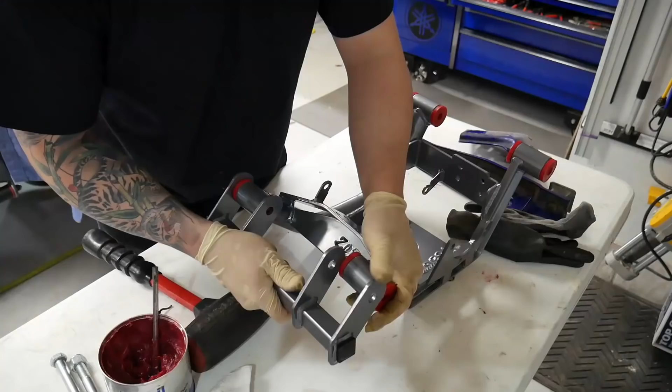In today's video, I'm going to be showing y'all how to rebuild a transfer case and check to see if it has to be shimmed to adjust for whether or not you're going to use stock gears with case wear, bearing wear, or if you're upgrading gears. So let's get to it.

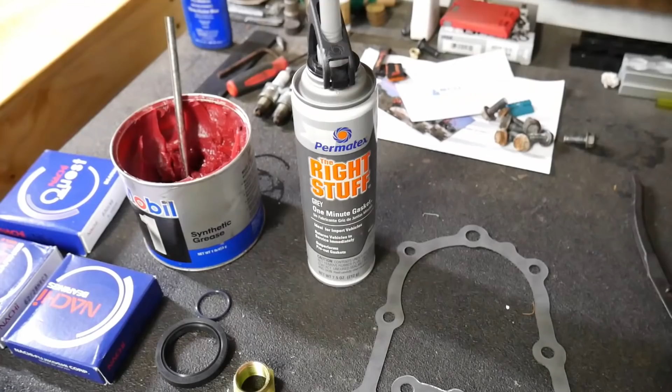Alright guys, I'm going to show y'all some of the tools you're going to need to do this job. If you're rebuilding your transfer case, you're going to need a rebuild kit for sure: your main case gasket and front cover gasket, two output shaft seals and your input shaft seal, your three flange nuts, and your O-ring for your countershaft. You're going to need bearings, axle grease, and some sort of adhesive gasket material. I'm using Permatex The Right Stuff. This is just what's highly recommended to use. You can actually use it as a substitute for a gasket when you have two metal mating surfaces.

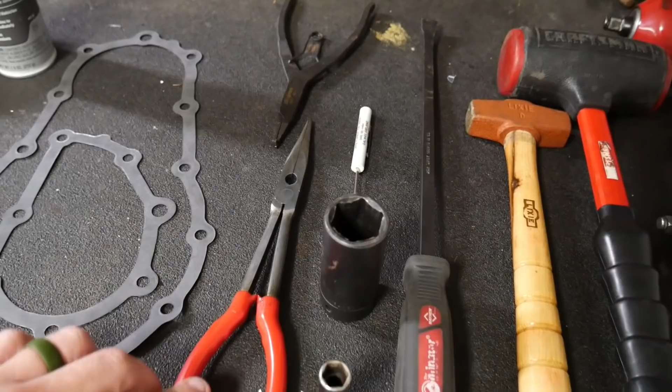You're gonna need some snap ring pliers, you're gonna need some needle nose pliers. They don't need to be these long ones, they can just be regular needle nose or a short pair. You're gonna need a shallow or deep 12mm socket. These flange nuts, the Trail Gear instructions say it's a 28, but this is a 27mm socket and it fits fine.

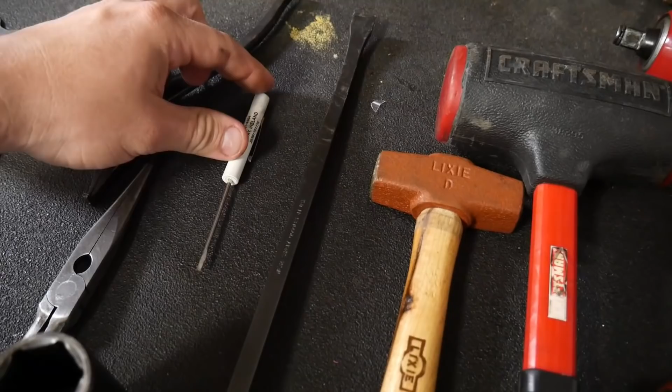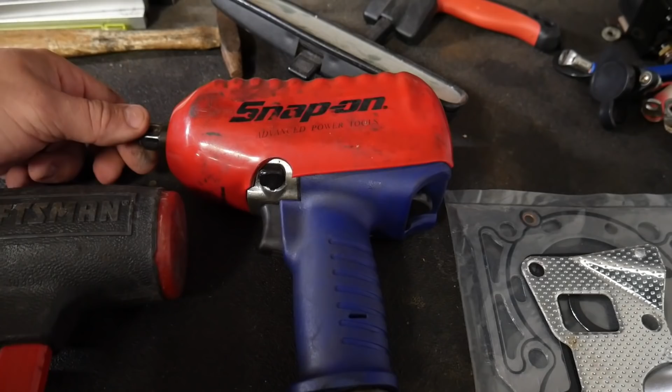A pocket screwdriver will be helpful, even just a regular flathead screwdriver. A pry bar, or it can be a ball peen hammer. I'm just opting to use a little brass mallet, a dead blow, or a rubber mallet. You can use a 3/8 impact gun or a 3/8 ratchet - probably be good to use both. You definitely don't want to use this to put it together because it's only, I want to say, 26 or 23 foot-pounds to put the case back together.

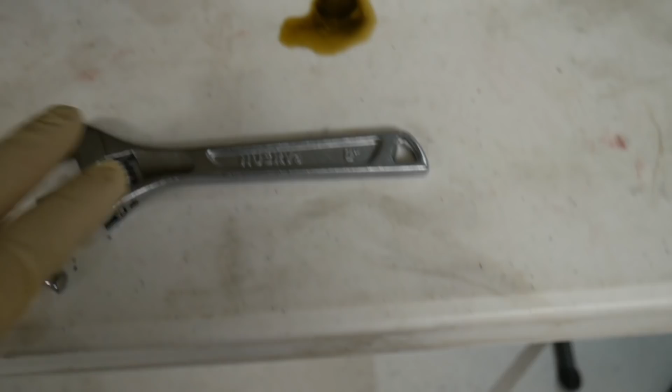And then a 1/2 impact will definitely help to take those flange nuts off, but you don't need to use that. You can use the 27mm socket with a 1/2 ratchet and put some bolts in the flanges, using this pry bar to hold it while you loosen them. You're going to need your transfer case, obviously, out of the truck. You don't need a parts washer, but it definitely helps clean up all of your parts. You're also going to need an adjustable wrench, a 1/4 inch ratchet, and a 10mm socket.

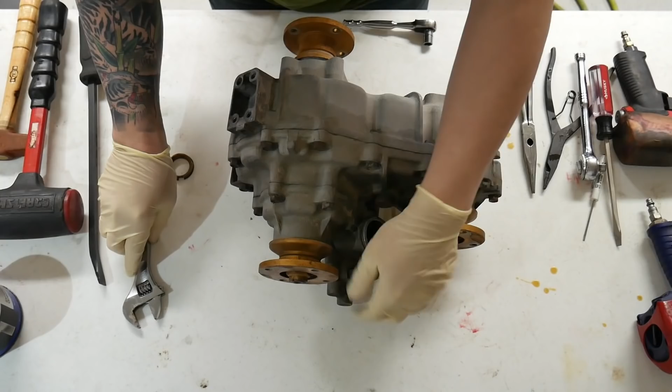Let's get this thing going. So the first thing you're going to do is take your 4-wheel drive selection switch out - just use your adjustable wrench and pull that out. Then you're going to want to flip the transfer case upside down to get that detent ball out for the 4-wheel drive switch. Note that it is actually larger than any of the other detent ball bearings, so keep that in mind so you'll know where it goes.

The next thing you're going to do is pull all these flanges off. You'll notice that the flange nuts are punched down with a punch to lock them in place so they will not come off. This is where having that impact is of great use, because you can use a punch to punch these kind of back out, but they're really gonna give you a hard time. So having the impact gun is really gonna help. It's not needed though - you can use a big breaker bar, put some bolts in here, and hold it with a pry bar to get them out.

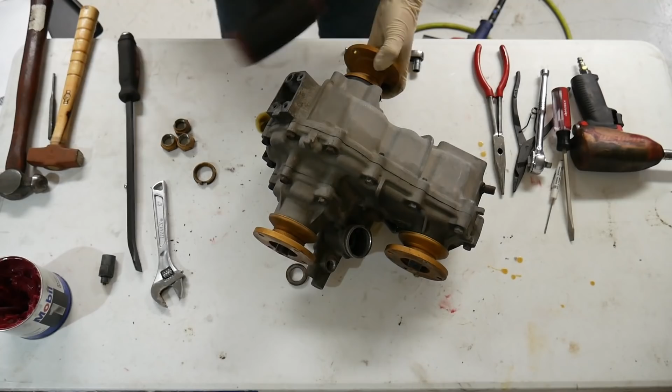Also want to make mention: your input flange and your front output flange are the same depth, but your rear output is longer. So keep that in mind, so that way you don't put your rear output flange as your input or your front output. So we got that off. You flip your transfer case upside down.

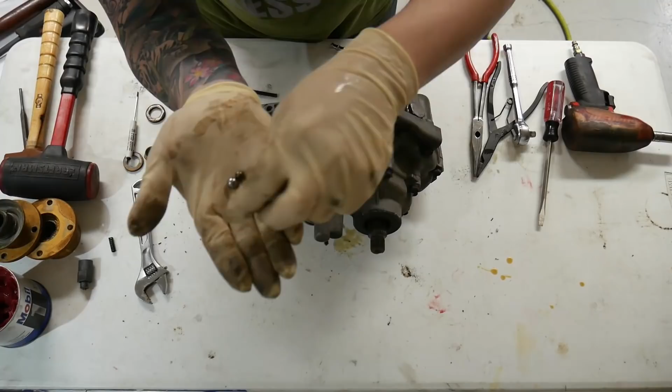Right here is a plug - it is a 6mm Allen. You just take that out, and inside there, use your little pocket screwdriver, you'll pull a spring out. Then flip it around upside down and a little detent ball will fall out. You can note the size difference between them - that four-wheel drive selector switch detent and then that other detent ball.

Next, your speedo cable sleeve - I pulled the 10mm out of here that holds the cable in. You want to remove that all the way, and then you're going to pull this sleeve out.

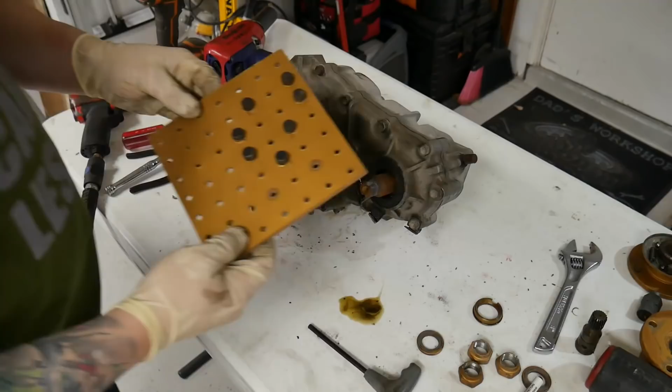We can take off this front case cover - this is where your 12mm comes into play. Now, these bolts are different lengths, so it will be good to kind of keep them oriented the way you pull them out. I'm gonna use a piece of pegboard that I drilled out bigger, and I just dropped all the bolts in - see, the bolts are different lengths. And I'm just gonna use this brass hammer to hit this case to get it to come off. There are these little tabs on the case that protrude out on the bottom and on the top that you can strike.

The next thing to pull out, right here's your countershaft with a 12mm bolt holding a little stay in place. And now we can pull the bolts that hold the two main case halves together.

And there should be 11 bolts. So, just like before, I took my pegboard and drilled the holes out a little bit larger, and dropped the bolts in the way they go.

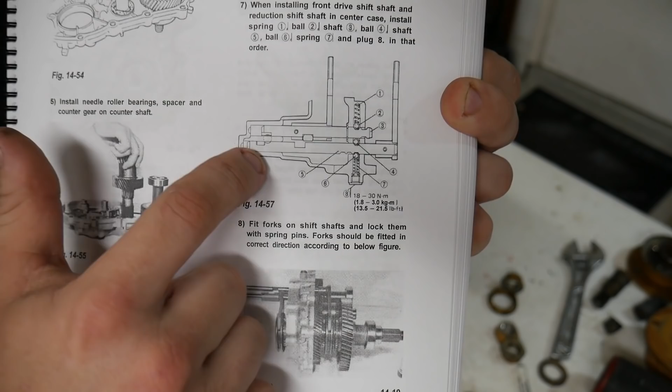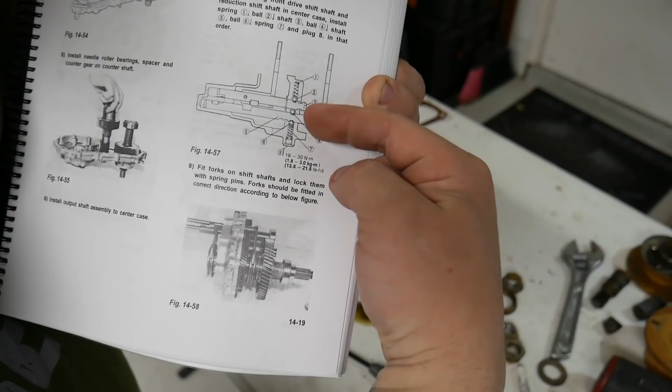So I want to show you all this diagram. This portion right here is the front case. These two shift levers have three detent balls. There's one right here with a spring, which we removed earlier on the bottom of the case. Then there's another one inside. Then here's the center detent ball. Because I'm doing the twin stick, I'm not going to reinstall that center ball.

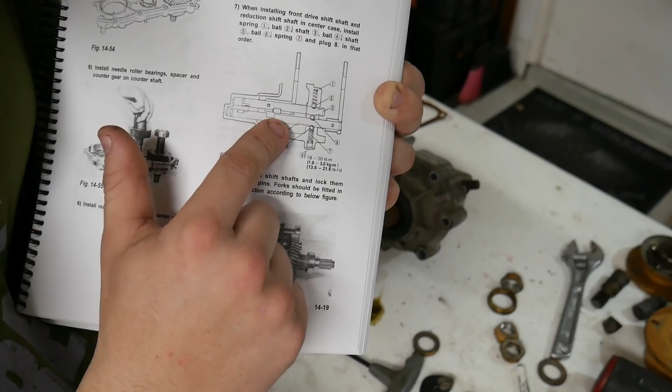That'll prevent the two shafts from moving at the same time. It only allows the shifter to move one or the other. So by removing that, you can work both sticks together. Just a heads up, let y'all know what we're going to come across here in a minute.

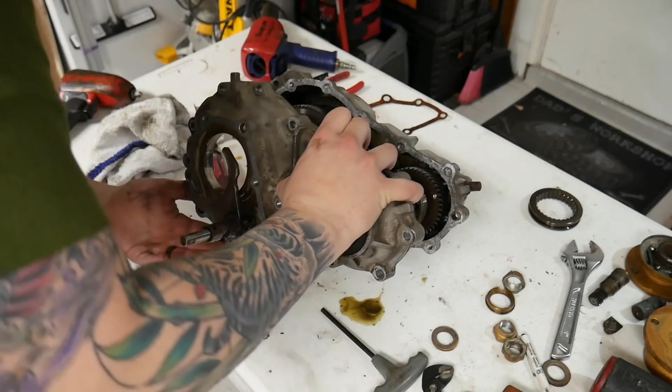I don't know if you can see in there, there is a detent ball inside of there. Here's that one we pulled out. It's the outside one for this shaft. There's another one inside here on a spring, and then right there is the center detent ball.

There we go, center detent ball. We won't be reusing that. And there is the other detent ball with the spring. As you can see, these three are all the same size, and that four-wheel drive sensor switch detent ball is larger. So for this twin stick, we'll use the two outside ones. We will not use the center one. Just to reiterate, not the center one.

Now you want to pull this counter shaft. You don't necessarily have to pull the whole thing out, but the whole thing's coming out. You want to pull this gear off. Here's your roller bearing. You want to inspect it to make sure it's good.

Here's this other one, and then here is a bearing spacer. It goes in between both of them to space them out so this gear is supported on both sets of helical cut gears. And on the back side of that counter shaft is the other thrust washer. The shim should be on these gear sets. Then we're going to pull this input gear assembly off.

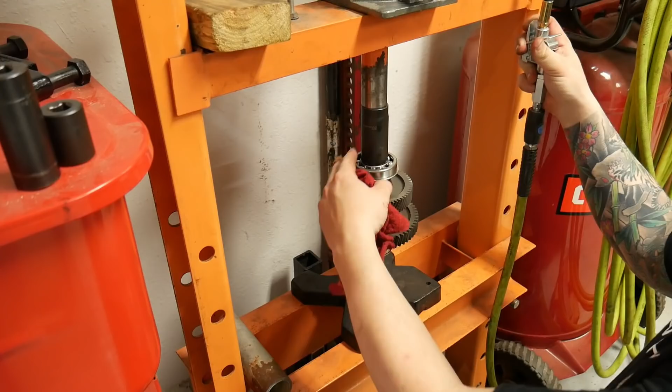I have the input shaft and the output shaft all assembled, all the bearings, all the gears are on them. So this is the part where you would take your case halves and measure the distances, and measure all the assembled shafts to check your actual thrust tolerances to make sure that you're within specification.

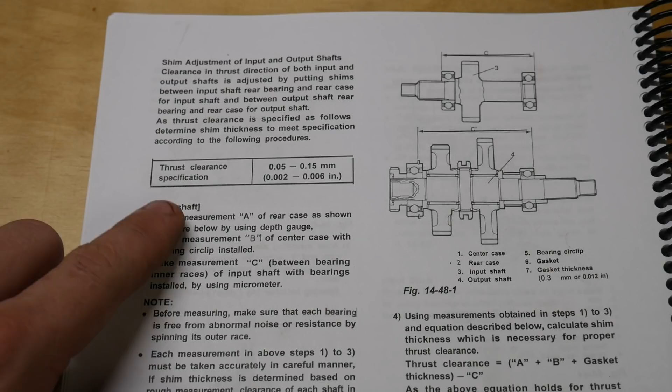At this point, this is where you would really need that Suzuki Samurai service manual to check the specifications, or watch this video. I'm going to give you all the specifications that you're going to need. Right here in the book, it says that your thrust clearance specification is 0.05 to 0.15 millimeters.

Now the way you do this is this diagram has the rear case half and the mid case half. This side is the input shaft side, and this side is the rear and front output shaft side. You're going to want to do the rear because it's the one that has the bearing to bearing mating surface, so you'll get the distance from the bearing mating surface to the case mating surface.

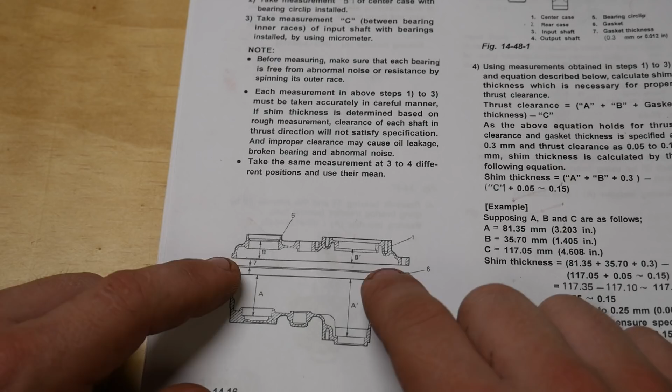You'll take your gasket thickness, which the crush gasket thickness is 0.3 millimeters, that's a constant. And then you're going to get your bearing mating surface to your case half on your mid case half. You'll add all that together. You'll take your bearing mating surface to your bearing mating surface on your input shaft.

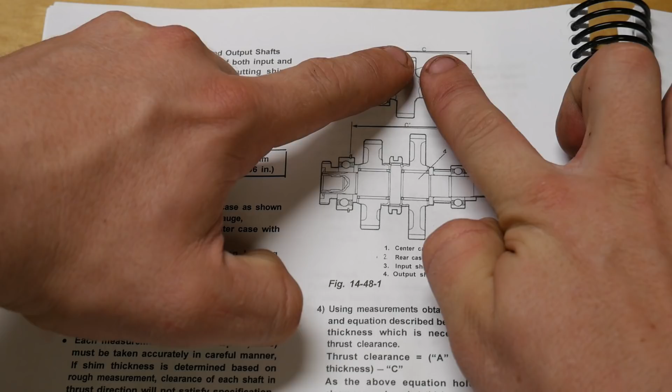You'll get that distance, which is C. And then you'll get that C-clip on that bearing on the output shaft, and then that outside mating surface on that bearing, and that'll give you C prime for the output shaft.

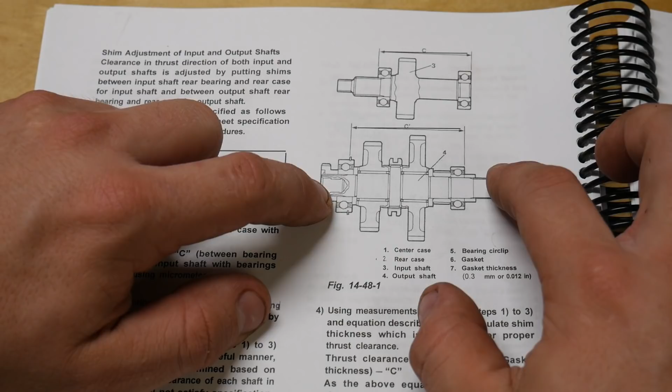So the caliper I'm going to use, I did get from Harbor Freight. Now the reason I'm using this one is because look at how precise it is. I have another one that just goes to 0.0, but as you can see right here, we need to be able to go to the 0.00 millimeter spot. My other caliper doesn't go down that far, this one does.

The other nice thing about this caliper is right here in the back, that is your depth gauge. Well, the nice thing is it will give you a digital readout of your depth.

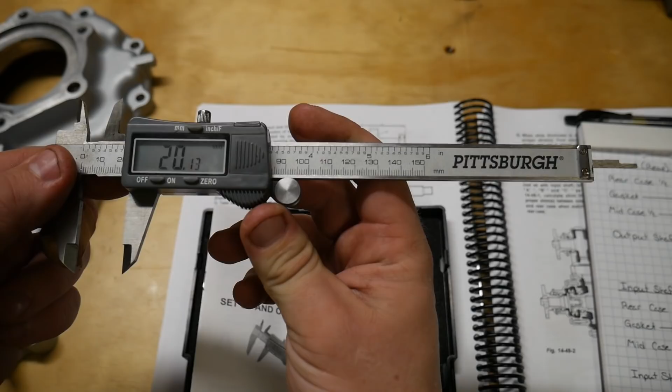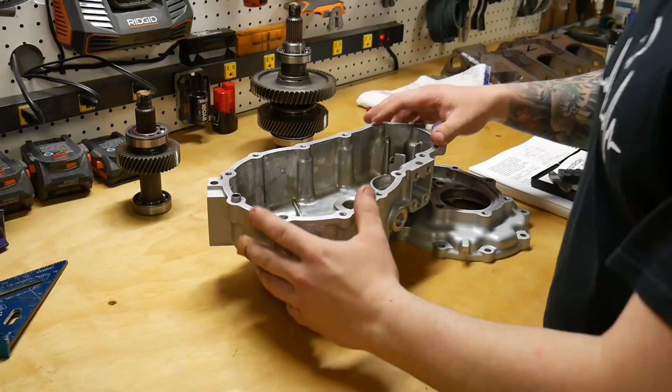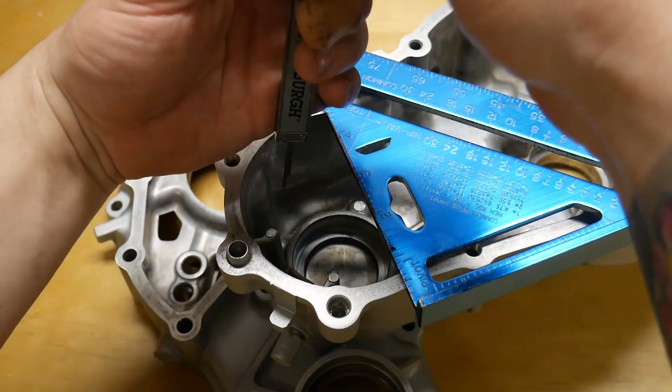The hardest part for getting this depth measurement is going from this bearing stop to the edge of the case. I'll use a speed square to set my stop limit, stopping at the very bottom of it. I'll work this depth gauge down until it touches that bearing mating surface, then take it to the bottom of the speed square and try to eyeball it the best I can.

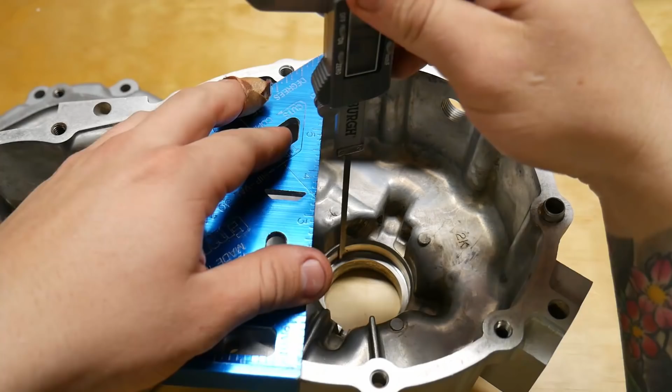Looks like it's 81.32. Then I'll do the same thing, put it right on my bearing surface. That looks spot on - 113.02. My gasket thickness is 0.3 millimeters for both.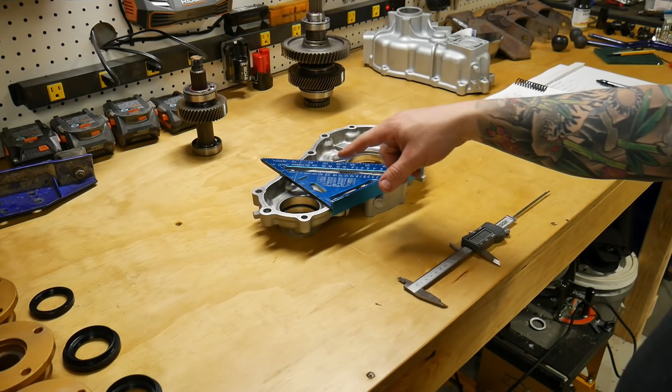Now I need to do my measurement for my mid case half. Zero out my gauge, I'm gonna go right on this snap ring, which looks like it's 35.82 for the input.

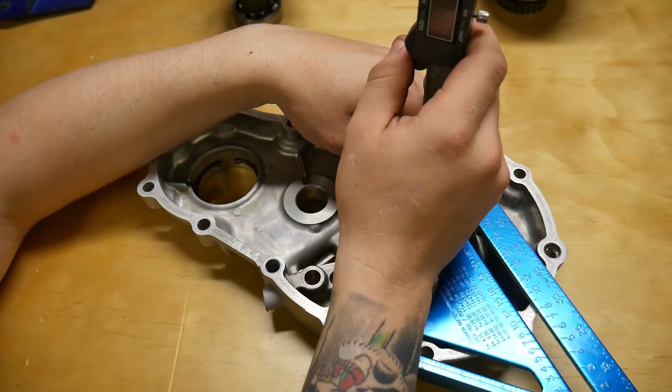Now I need to take my output shaft. 27.55. Now I'm going to take my input shaft, make sure my gauge is zeroed out. 116.9.

Maybe 117 actually, 117 even, I want to say. Now this one will definitely be the hardest one because of this bigger gear.

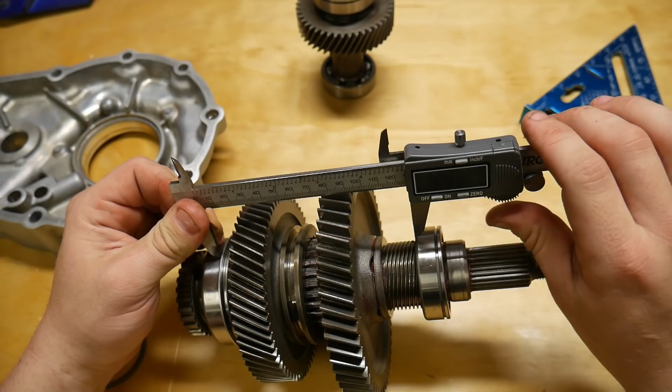Maybe like this will work. Looks like 140.49, maybe. All right.

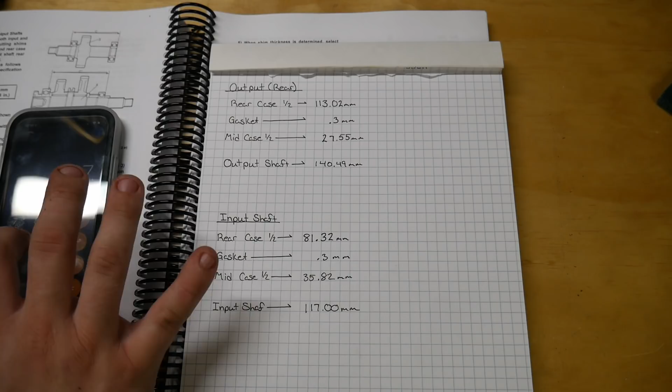So for the output shaft, I got 113.02 plus 0.3 plus 27.55. That gives me 140.87 millimeters.

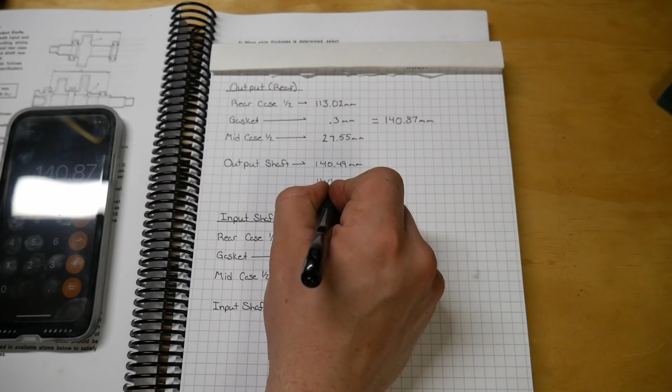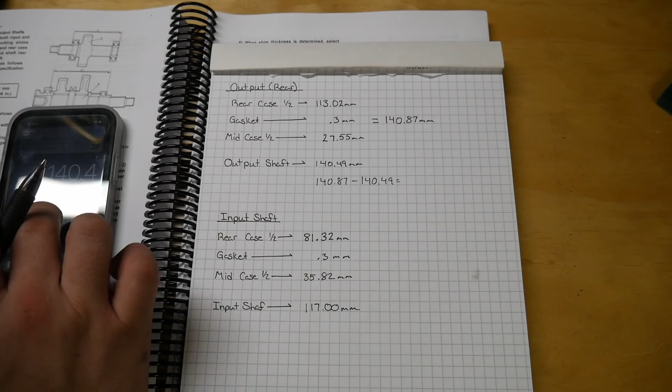So to figure this out, that's the case distance, here's the shaft. You're going to take that 140.87 minus 140.49, which gives me 0.38 millimeters.

And then the input shaft is 81.32 plus my 0.3 for my gasket plus 35.82, which is 117.44 millimeters. We're going to do the same thing.

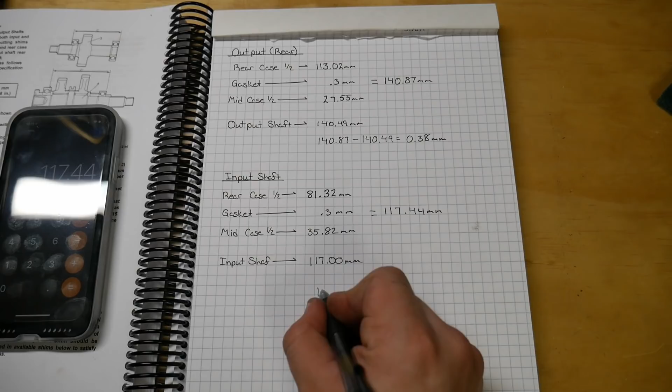We're going to do that 117.44 millimeters minus 117 even, which is 0.44 millimeters. So the number that we need is 0.05 to 0.15 millimeters.

So if you take this one minus the 0.05, which is the minimum bearing clearance, it's 0.33 millimeters, and that's on the output shaft.

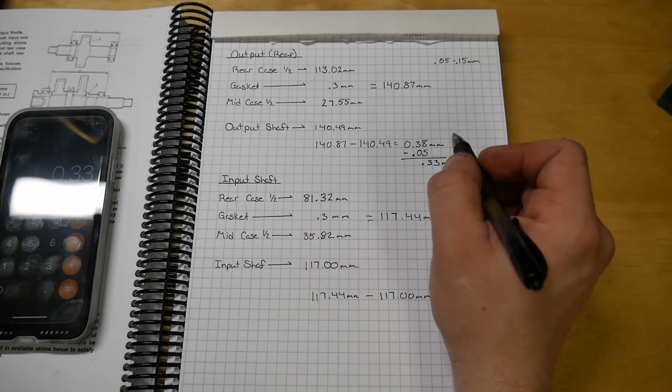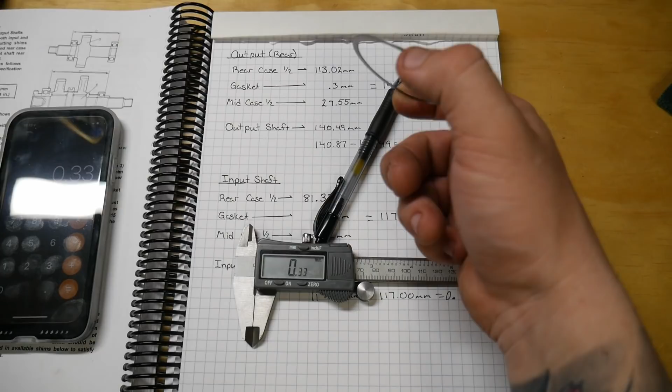Now the shim that came on it, if I'm not mistaken, it's a 0.3 millimeter. Yep, 0.33.

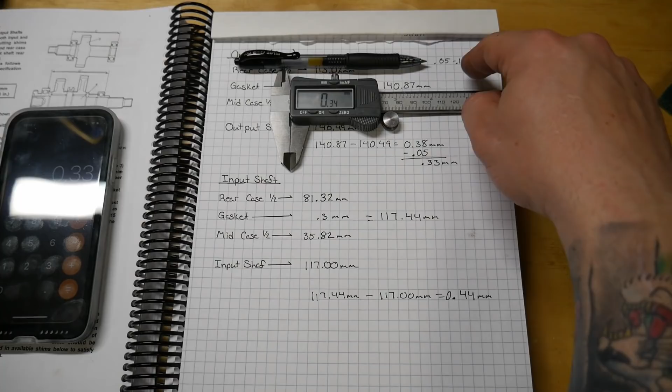So this shim that came on the output shaft is correct, I can use it again on the output shaft, which is good. You kind of just got to mess around - like I tried the 0.15 millimeter, like the max, and it was too much. So then I come down here to the 0.44 and I subtract it by the 0.05.

It would need to be a 0.39 millimeter. Or if I did 0.44 minus... no, 0.44 minus the 0.15, which would be a 0.29, right?

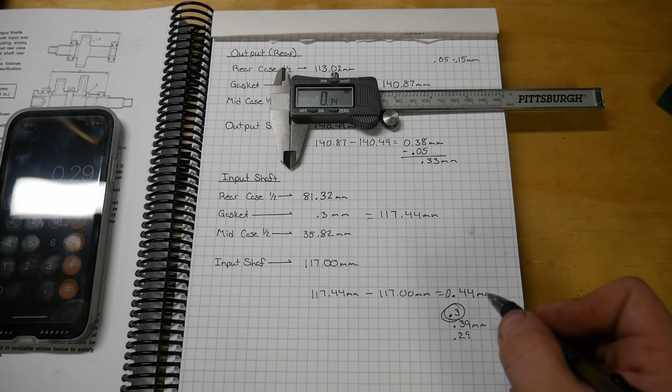So I would need another 0.3 millimeter shim. I need to order another one of these for the input shaft.

Well, I hope that really kind of illustrates for you guys how to shim a transfer case. The shim that was on my output shaft originally is perfect for what I needed. I need to get a shim for my input shaft. I'll get that ordered so we can complete assembling this transfer case to finish this video, and then I'll be able to do the video installing it in the cradle and putting it in the truck.

Well guys, got the shim in. I didn't know this, but Zuks Offroad is able to get these shims. It's not listed on their website, but I just called up Myron and he told me he can get them no problem. So we can get this transfer case rebuild done.

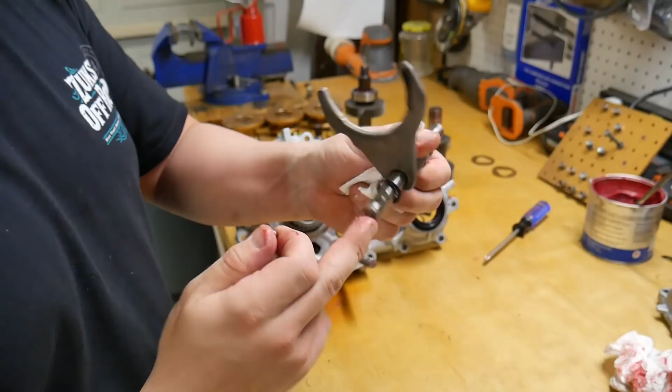Here I put the first shift fork in. This shift fork is the driver's side shift fork. If you're not doing the twin stick modification, inside this hole you will drop one of the 3 smaller ball bearings. It'll fall through, and this shifter, you shift it into neutral, there's a cutaway. The other one has 3 marks on the outside and 1 in the middle. That ball bearing will drop into this spot out of the way.

You'll drop a second one of these into a spot on the spring that I just dropped in, and it will go on one of these notches of this. I'm doing the twin stick mod, so I'm only going to use 2 of these. I'm not going to put the middle one in, I just wanted to point that out. So we'll put the jams back on and we'll keep going.

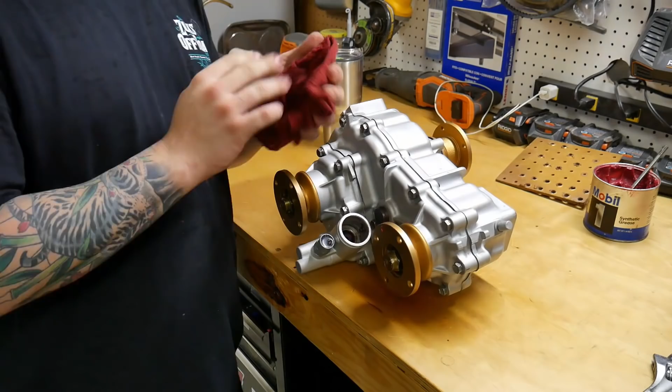Well guys, the transfer case is shimmed and the rebuild is complete. The next video in this series, I'll be installing that Zuks Offroad driver's side transfer case mount.